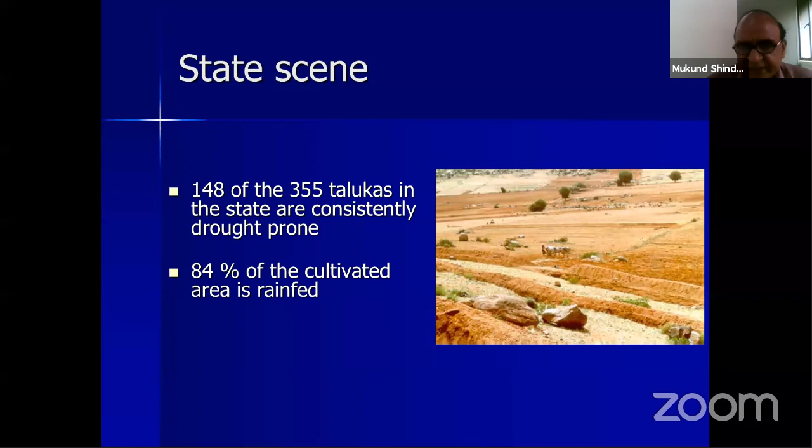Now, if again we take the context of the state of Maharashtra, this is the usual practice: 148 of the 355 talukas or tahsils in Maharashtra are consistently drought prone, and 84% of the cultivated area is dependent on rainfall for its agriculture.

So what is the solution actually? There are two solutions: one is construction of big reservoirs and the other is rainwater harvesting. Construction of big reservoirs has to take place at certain topographical locations. It is not necessary that we will find those locations or sites everywhere in the state.

In Maharashtra, most of these sites have already been exploited. Even the remaining sites, which may not be economically viable, even if dams are constructed there, the area under these big reservoirs will not go beyond 30%. So 60 to 70% of the area in the state of Maharashtra will depend on rainwater harvesting for making water available.

As far as India is concerned, this area will be around 50%. So 50% of the area in India will depend solely on rainwater harvesting for agriculture or domestic purposes. That signifies the importance of rainwater harvesting. It is the harvesting of the rain and resulting runoff where it occurs - that's what we call rainwater harvesting.

Now, looking at the potential of rainwater harvesting, this is a theoretical statement but still has its own importance. For example, if half of India's average annual rainfall of 1170 millimeters is captured over 1.12 hectares in each of the country's 5,87,226 villages, then the 6.57 million liters of rainwater collected will meet the annual cooking and drinking needs for an average village of 1,200 people. So that is the potential of rainwater harvesting.

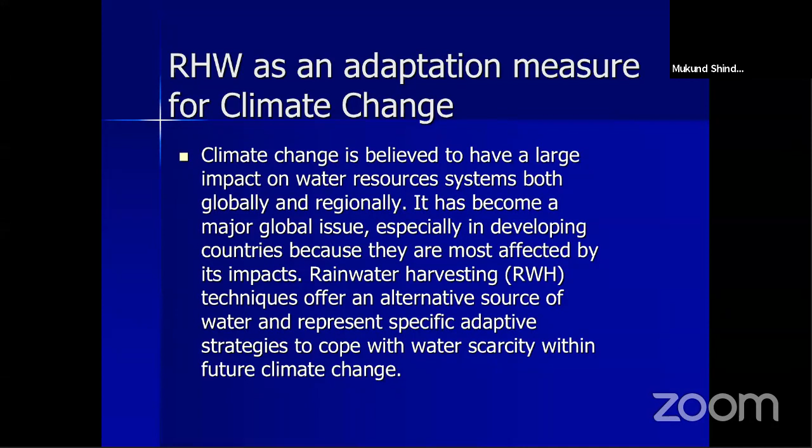So this rainwater harvesting - these are local measures or local interventions. Even if they fail, there is less risk of damage. They are decentralized and quite supportive to the local communities. Of course, they also come with some drawbacks, which I will discuss during the presentation.

Now, basically there are two major approaches of rainwater harvesting. One is in situ rainwater harvesting, which is capturing the rain where it falls, and another is ex situ rainwater harvesting. The in situ rainwater harvesting practices will be delivered by some other speaker - there is a separate lecture on this, so I will not discuss in situ rainwater harvesting here.

Ex situ rainwater harvesting involves moving water for some distance and storing it at a distance with big reservoirs. For example, these Nala bunds are very popular structures in watershed development programs. They are constructed on the main streams in the Nala, maybe of second or third order. They recharge the surrounding area and the aquifer below, hold the silt flowing through the streams, and have a good storage excavation ratio.

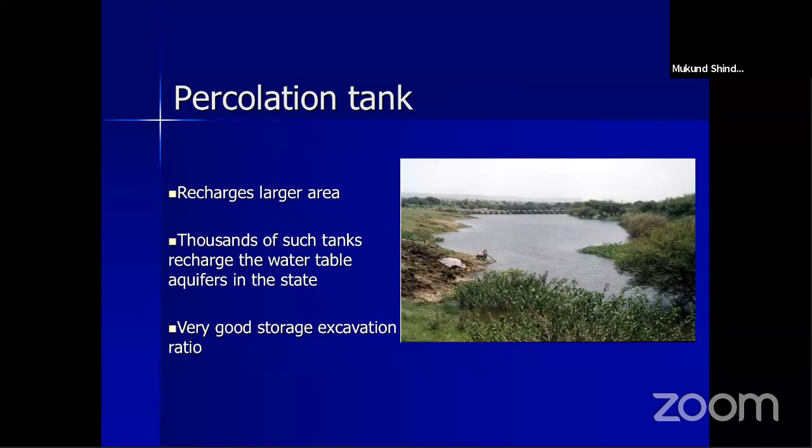Then the bigger structures in the watershed are percolation tanks. They recharge large areas - thousands of such tanks recharge the water table aquifer in Maharashtra. They have a very good storage excavation ratio.

Now, in Maharashtra and out of Maharashtra, in India, huge work on watershed development has been done since the past, and still it is progressing. There are many successful case studies. So I will briefly discuss a couple of case studies in Maharashtra.

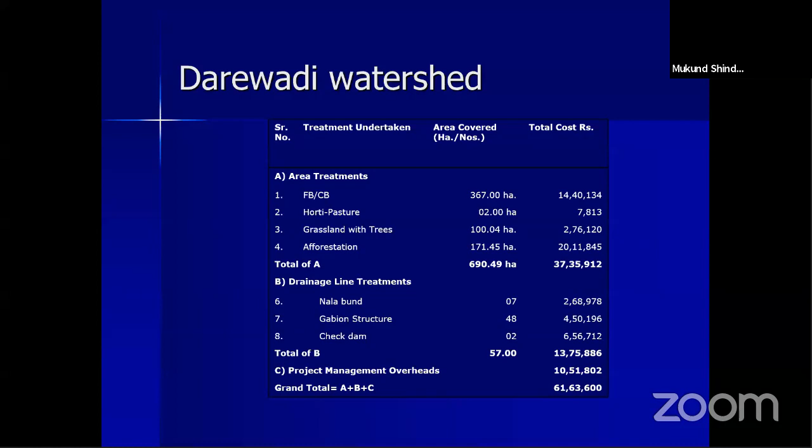You can see the statistics before watershed development, after watershed development, and the January 2005 situation. Before watershed development in 1996, tankers were needed every year. But after watershed development, during 2001, the village became completely tanker free, and it still is. The average depth of the water table below ground level was 6.5 meters before watershed development. After watershed development, since 2001, the groundwater level is 3.5 meters below the ground surface, and as of today it is around 3 to 3.5 meters below the ground surface.

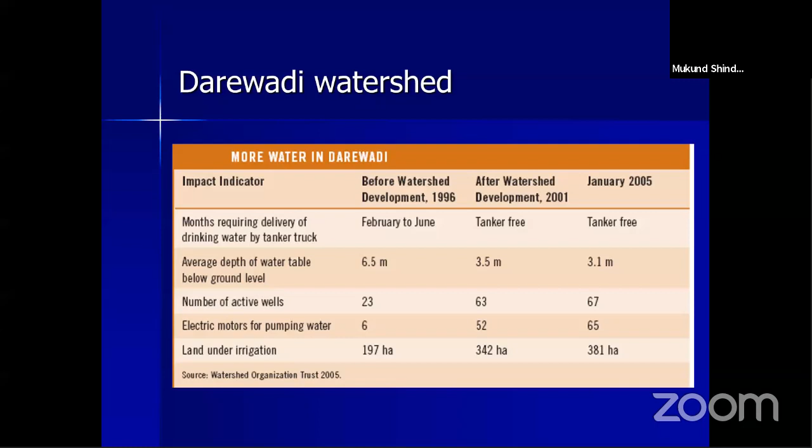There is another case study which is again quite popular, the Hivre Bazar watershed. This watershed development project is led by Popatrao Pawar, who received the Padma Shri award last year. This village is also very water scarce, with annual rainfall of 350 to 400 millimeter. The total cropping is rain-fed, there is heavy soil erosion, and problems of drinking water unavailability and unavailability of fuel wood.

Under the leadership of Popatrao Pawar, watershed development activities were carried out, resulting in a rise in the water table from 70-80 feet to 20-25 feet below the ground surface. There is a change in cropping pattern from traditional jawar and bajra to more cash crops like onion, potato, and horticulture, along with an increase in cropping intensity. There is an increase in fodder availability from 1,500 metric tons to 6,000 metric tons, and an increase in milk production from 300 liters to 3,000 liters per day.

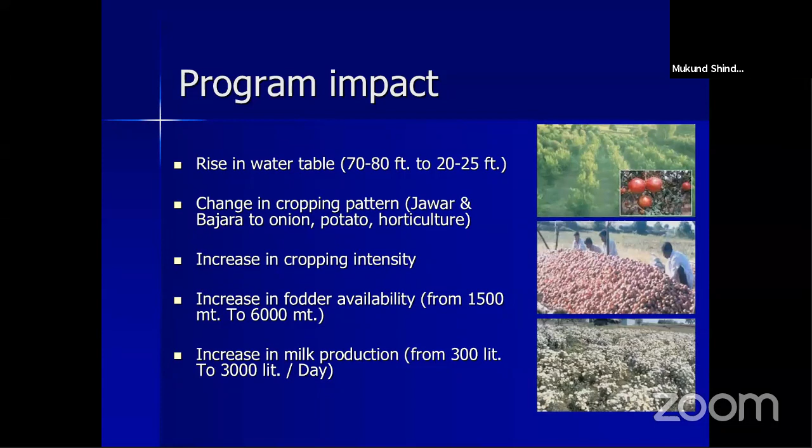Now, what are the benefits of these watershed development activities or projects? There is decrease in surface runoff, that is flash floods and soil erosion, increased surface water storage, increased groundwater storage, increased soil moisture storage, better crop yields, conservation of natural resources, better socio-economy of the village, and better sense of cooperation and community ownership among the villagers.

Now, we have one of the biggest programs of watershed development in the country, with an expenditure of around 2,000 crores per year, spreading from Rajasthan to Assam and Himachal Pradesh to Kerala.

The couple of case studies, success studies, which I just narrated, are actually very few as compared to the total watershed development projects in the state and the country. We don't find such success stories spread across different states of the country.

The results are not encouraging at many other watersheds. Many watershed projects have basic design flaws. During the early period of watershed development, there was a lack of community participation. Traditional structures were not accounted for in development. There is often failure in the primary objective of land degradation. Then there is a lack of consistent criteria for selecting villages, and lack of consistency in the norms and process of implementation of the watershed. These are some of the hurdles.

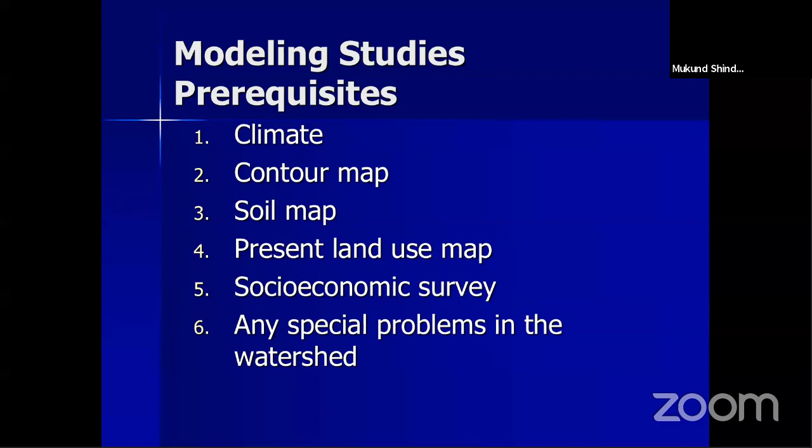And when you decide to go for modeling studies, there are some prerequisites in the form of data. For example, climate data, socioeconomic survey, and any special problems of the watershed. Then you have to go for peak rate of runoff, estimation of soil losses, upstream-downstream scenarios, designing different practices, estimation of crop water requirements, and any special problems.

So I will share with you one or two modeling studies which have been conducted as part of MTech and PhD research.

This is a decision support system for optimization of farm pond, based on the study of one MTech student guided by Dr. S.D. Gorantiwar, Head of Agriculture Engineering Department.

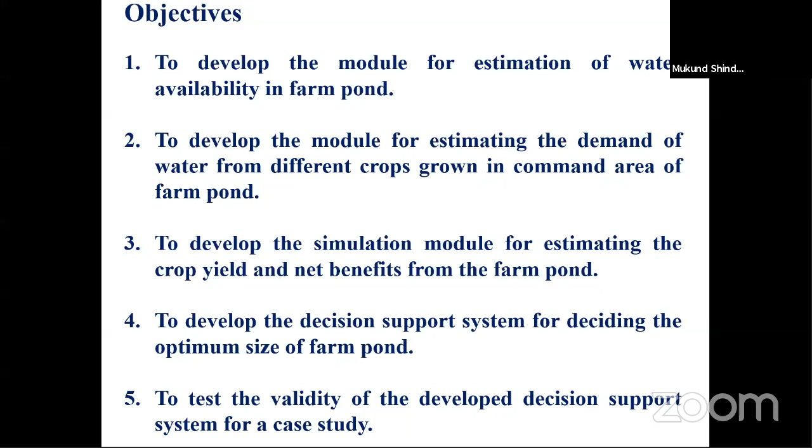The objective of this study was to develop a module for estimation of water availability in the farm pond, then to develop a module for estimating the demand of water from different crops grown in the command area of the farm pond, then to develop a simulation module for estimating crop yield and net benefits from the farm pond, to develop the decision support system for deciding the optimum size of the farm pond, and to test the validity of the developed decision support system for a case study.

So this is the equation of the pond water balance, a water balance equation which takes into account all the inflows and outflows. For example, VT is the volume of water stored in the farm pond on the Tth day, VT minus 1 is the volume of water stored on the T minus 1th day, and QT is the inflow to the farm pond through runoff on the Tth day.

QT1 is the inflow to the farm pond through other sources on the Tth day. RFIT is the inflow due to rainfall over the pond surface area on the Tth day. IT is the water released for irrigation on the Tth day. SLT is the seepage losses from the farm pond on the Tth day. SET is the water loss due to evaporation from the open surface on the Tth day. WDT is the withdrawal of water from the farm pond for other purposes on the Tth day. And V0 is the volume of water stored in the farm pond at the beginning, that is, when T is equal to 1. This equation gives the water balance of the farm pond.

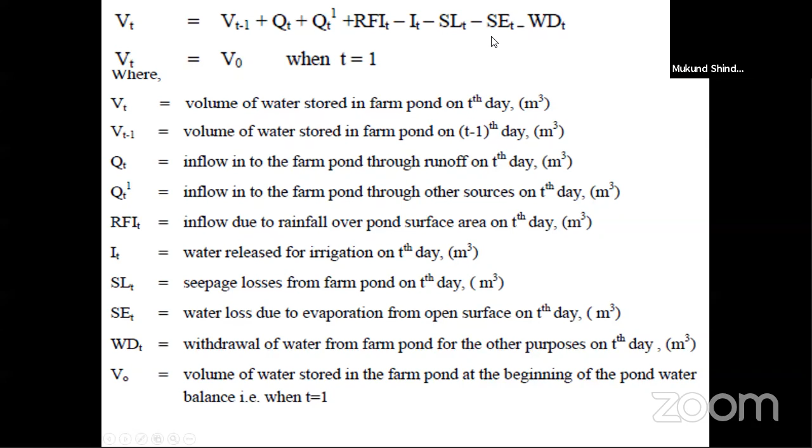Then the pond can be of different shapes. These are common shapes: rectangular, trapezoidal, and circular. These three shapes have been considered in this simulation model.

Then for the trapezoidal or truncated pyramid pond, we again have geometric equations for the surface area, wetted area, volume of water after change in depth, top surface area after change in depth, and surface wetted area.

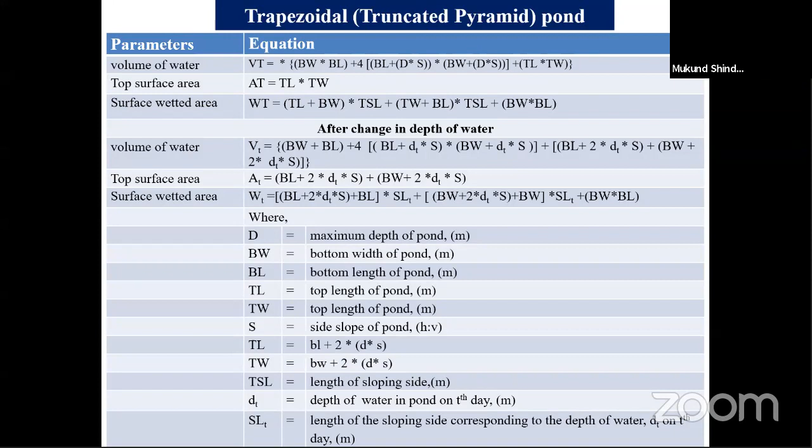Then the design of the pond, or deciding the size of the pond, depends on the following parameters: supply side and demand side. From the supply side, there is runoff as a result of rainfall over the catchment area, direct rainfall over the pond surface, and external inflow from other sources.

Normally, when we say pond, we assume it is a hydrological pond. In a hydrological pond, there is always inflow from runoff only, along with precipitation over the pond surface. So there are only these two inflows, and this water has to be used for domestic or agriculture purposes during the dry spells. There is an inlet and outlet to the pond for inflow water to come in and outflow to go out. But nowadays, many farm ponds we find are storage ponds.

Many times the ponds are fed with water from other sources like canals, rivers, or wells. So provision has been made in this model to have external inflow from other sources to the pond. Now, the water demand consists of seepage losses, evaporation losses, and crop water demand, that is, for irrigation.

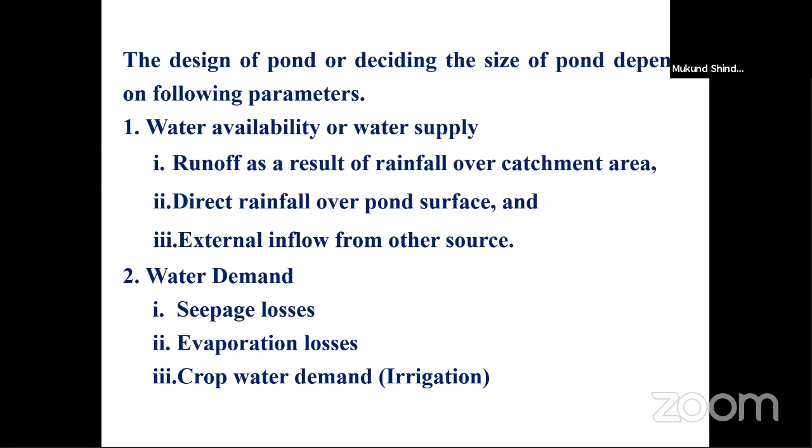Then water demand. Water demand consists of seepage, which is given by this equation. I will not go into the details of the equation.

Then evaporation is given by the equation SE T equals AT into ET divided by 1000. ET is the evaporation rate of water from open surface corresponding to the depth of water. Then same thing about the seepage.

Irrigation can be surface irrigation, drip irrigation, or sprinkler irrigation. These are the three irrigation methods considered in this model.

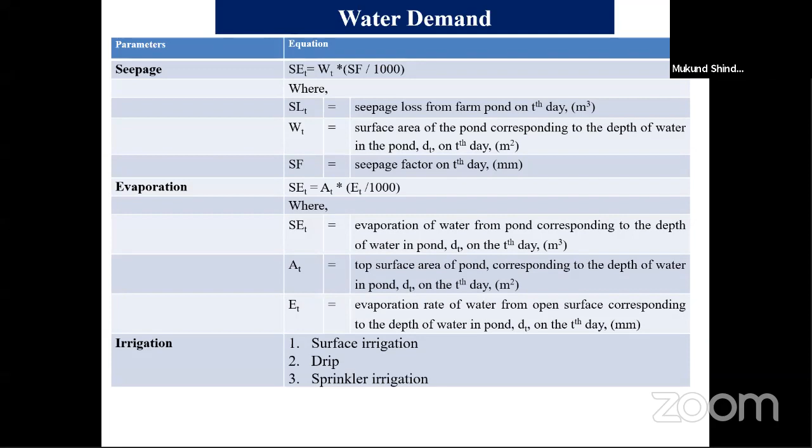There are some irrigation strategies. One strategy is pre-decided irrigation, that is fixed depth and fixed date, where we give irrigation on a fixed date and fixed depth. Then fixed date, variable depth is another strategy, based on the climatological approach. Then there is variable depth, variable date.

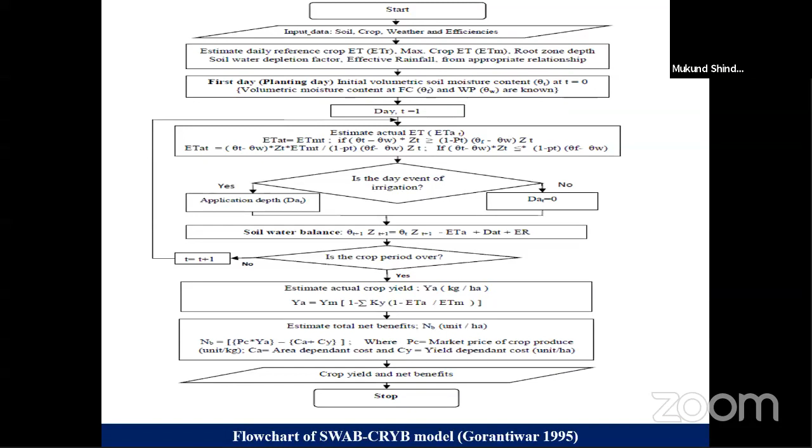So this is the flowchart of the SWAB-CRYB model. This farm water balance, or farm pond water balance module, is attached to the SWAB-CRYB model, which is again developed by Dr. Gorantiwar. This SWAB-CRYB model is a comprehensive model of soil water balance, which gives the continuous soil water balance along with the crop yields and the net benefits. This is the flowchart of this SWAB-CRYB model.

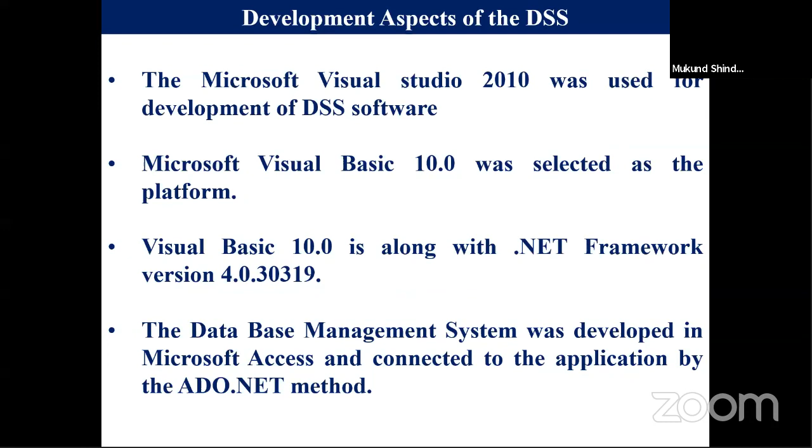So these are the results, and these are the screenshots of the model. This is the input screen of the model. There are icons like runoff, reference evapotranspiration, pond characteristics, pond water balance, simulation, and pond optimization.

These are the input details for runoff: total catchment area, runoff coefficient for the command area, input rainfall data file. Rainfall has to be given with the help of the file, for a number of years, and you have to select the years. Then this will calculate the runoff from the given data.

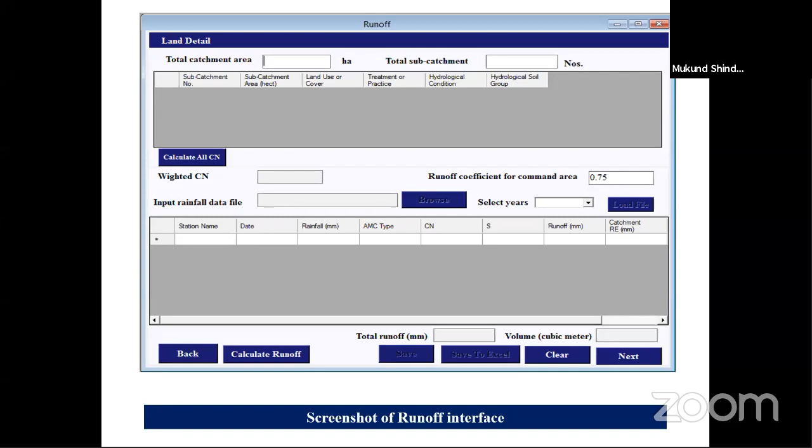So runoff will be daily runoff. Then for evapotranspiration, there are three methods supported by this model: Penman-Monteith, pan evaporation, and Hargreaves-Samani. We can select any of these three methods based on the availability of data with the user.

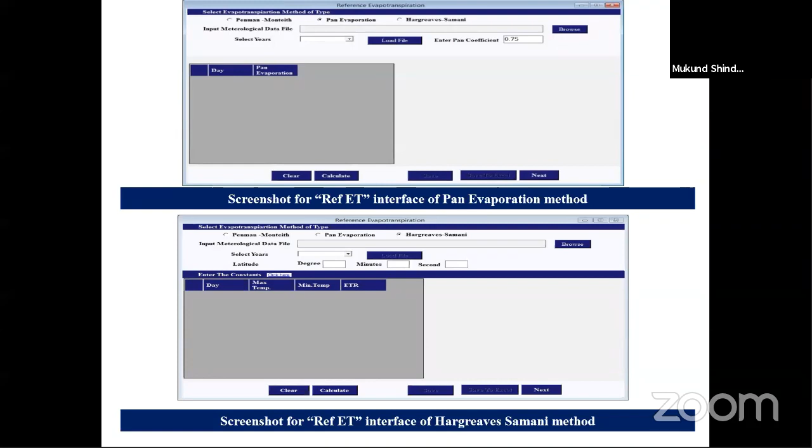So we have to select the data files. Normally these are all climate data files, and the model will give the output in the form of daily reference evapotranspiration.

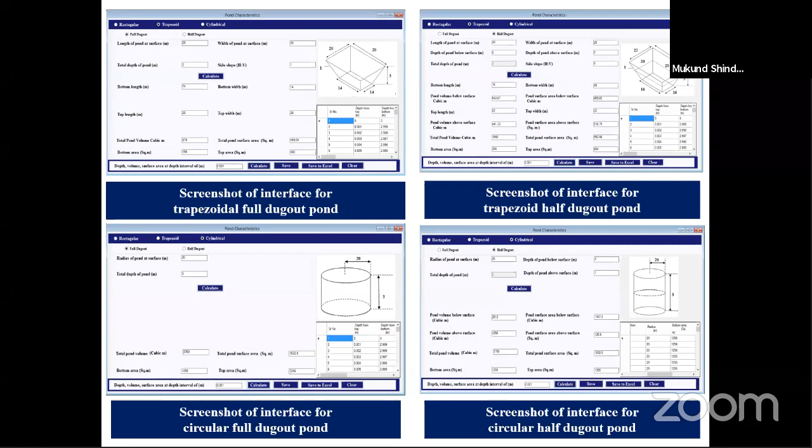Same thing about the screenshot of the interface for rectangular half dugout pond. Then these are the screenshots of the interface for trapezoidal full dugout, trapezoidal half dugout pond, circular full dugout, and circular half dugout pond. The geometrical length, width, depths, slopes we have to give as input, and the model will calculate the different areas and volumes, which will be required for calculating the water balance components of the farm pond.

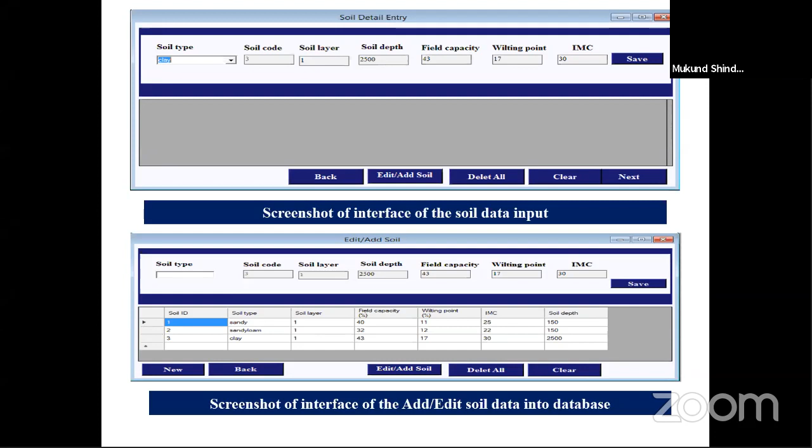At the bottom is the screenshot of the interface to edit and add soil data into the database, so you can add more soils to this database.

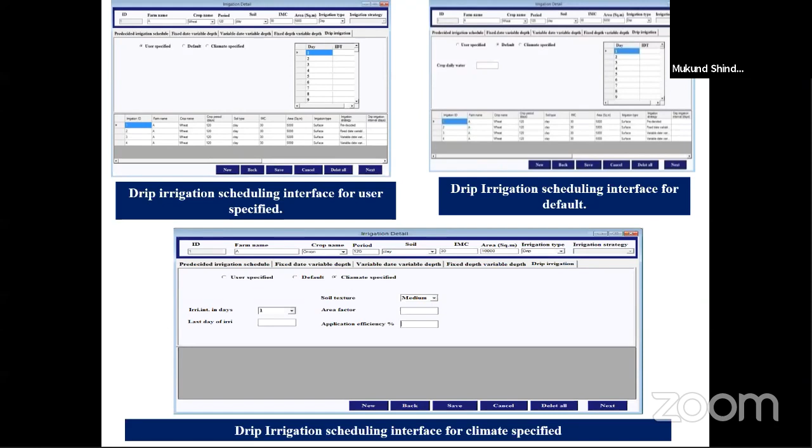At the bottom is the drip irrigation scheduling interface for climate specified, based on the climatological approach.

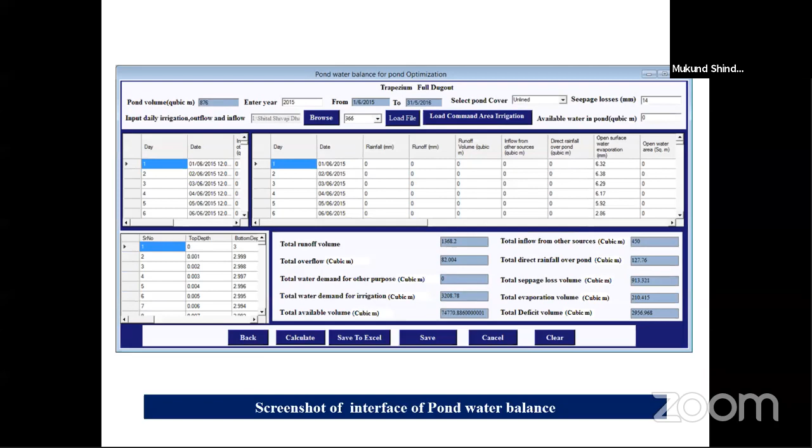This is the pond water balance optimization screenshot, where you get all the pond water balance parameters.

Now I will discuss this model with the help of a small case study. This is the case study of an area which is 2.33 hectares, with a total of two catchments of areas 0.85 hectare and 1.48 hectare.

Both the catchments are row crops. They are contoured, in very good hydrological condition, and the hydrological soil group is C and D.

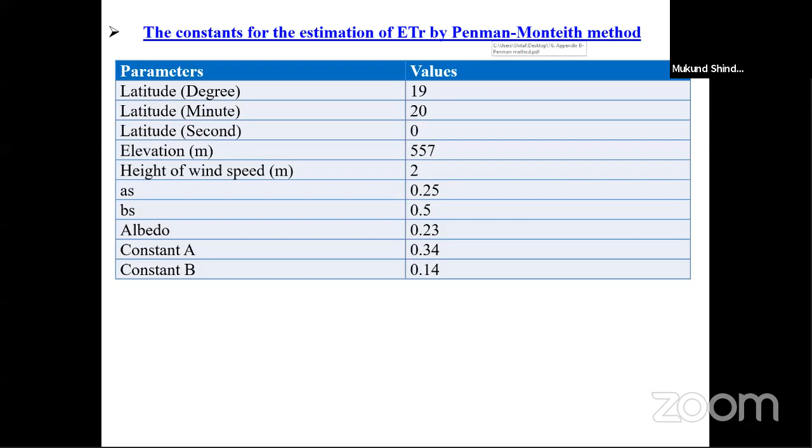These are the different parameters for estimation of ETr by the Penman-Monteith method: latitude, longitude, elevation, height of wind speed, AS, BS, albedo, constant A and constant B.

This is the interval which you can select for simulating the level of water in the pond, or the pond water volume.

These are the properties of the soil in the command area of the farm: it is clay type, moisture content at field capacity is 43, wilting point is 17, and available soil depth is 250 centimeters.

Details of irrigation strategies considered for onion and sorghum: for onion, it is climate specified; for sorghum, it is pre-decided.

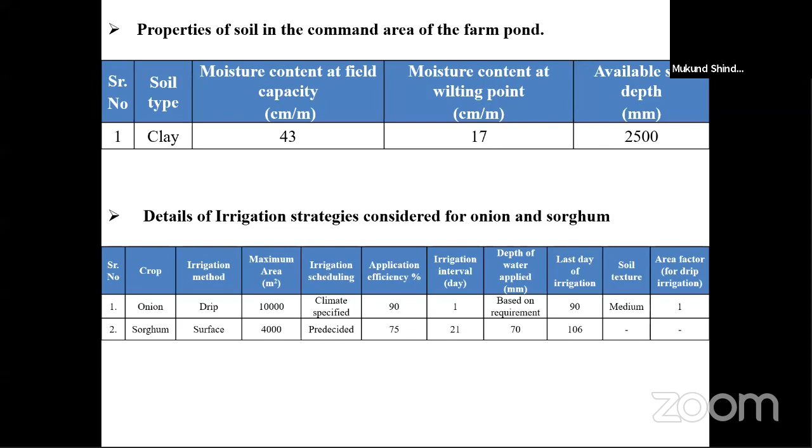The irrigation interval for onion is drip, with a 1 day interval. For sorghum, it is surface irrigation with a 21 day interval. For onion, as it is drip irrigation, application efficiency is considered as 90%, and for sorghum it is considered as 75%.

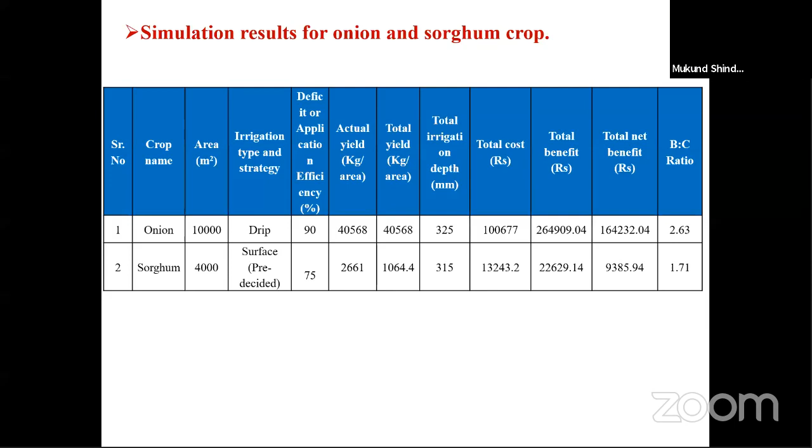So the conclusion is that a pond volume of 1,461 cubic meters is useful for onion over an area of 2,000 square meters, with rupees 32,846 net benefits for Rahuri region.

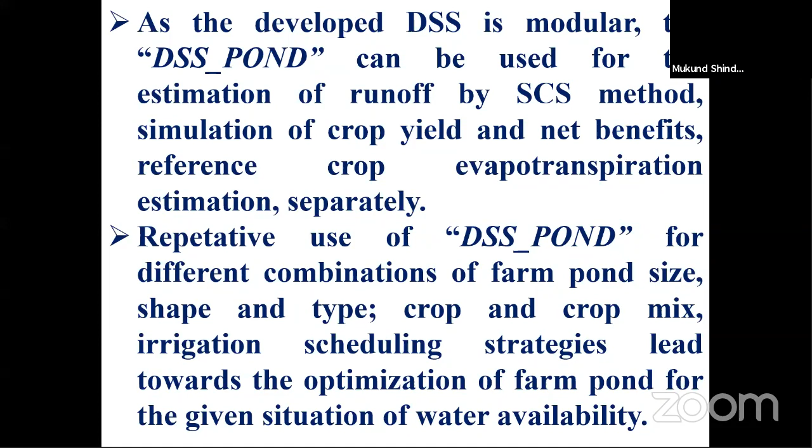So this was one model study. Another is based on my PhD research. I developed a model for designing the system of tanks in the watershed, and I named this model the Soft Tank Model. There are some research hypotheses.

For example, in situ rainwater harvesting systems influence the storages of downstream ex situ rainwater harvesting systems, that is, tanks. Hence both in situ and ex situ rainwater harvesting systems should be considered together in the methodology for optimum design of tank systems in the watershed. Rational design of the tank system for the watershed should be obtained by investigating different scenarios resulting from the combination of number of tanks, their locations, and types.

For example, there may be suitable tank locations, or suitable sites, in the watershed. There may be, say, 5 sites for constructing tanks. So we can have 5 tanks, or 3 tanks, or just 1 tank. Many times we find that the water in the tanks, apart from recharge, can be used for irrigation. This irrigation can be given upstream of the tank, or downstream of the tank. Based on all these factors, the hypothesis says these factors should be considered while designing the tanks in the watershed.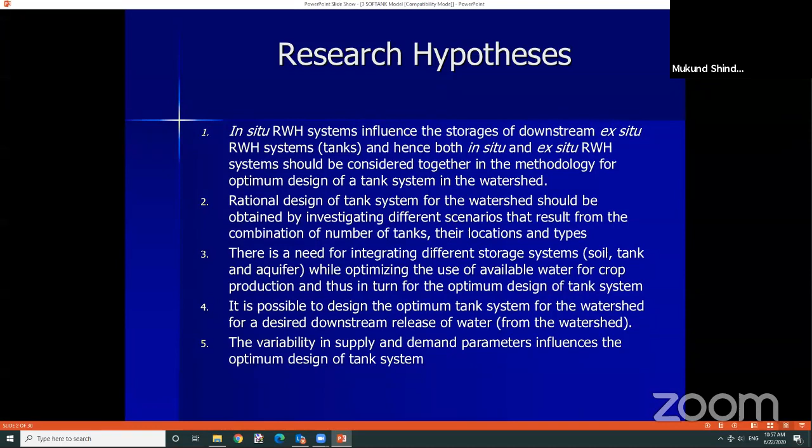The variability in supply and demand parameters influences the optimal design of the tank system. If there is a change in climate and resulting rainfall and runoff, it will affect the supply and the tank system design. Similarly, when there is a change in climate, there is a change in crop transpiration requirement, so there is change in demand. All these supply and demand parameters will affect the tank system design. Based on this hypothesis, this research was carried out, and it is conceived that in the watershed, all these in situ and ex situ rainwater harvesting practices are integrated.

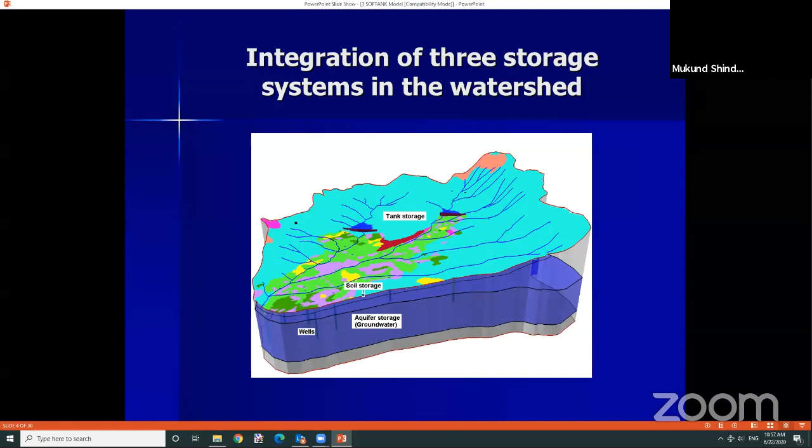This is the conceptual figure of integration of the 3 storage systems in the watershed - tank storage on the stream, or off the stream; soil storage, a thin layer of ground ranging from as less as 7.5 centimeters to as high as more than 90 centimeters; and aquifer storage in the form of groundwater. These storages store water from rainfall and runoff, which is used for domestic purposes and agriculture.

So I reviewed the literature of these modeling approaches and found that there are studies for single tank systems and multi-tank systems. The studies approaches were empirical, then simulation modeling, then simulation optimization modeling, and mathematical modeling. And then I found that there was some scope for simulation optimization modeling for multi-tank systems in the watershed.

So this is a flowchart of the SOFTANK model. Of course, this is a conceptual flowchart. The detailed flowcharts I have not given.

So first, the possible locations of the tanks are identified on the streams, that is the main stream. Then fields are allocated to these possible locations. Then the tank strategies are generated based on the tank location and the tank types. Then the catchment and command fields are allocated to these tanks.

Then different tank strategies are generated, and the simulation is started from tank strategy number 1. Then tank dimensions are calculated. Then daily simulation of field, tank, and groundwater balance is done.

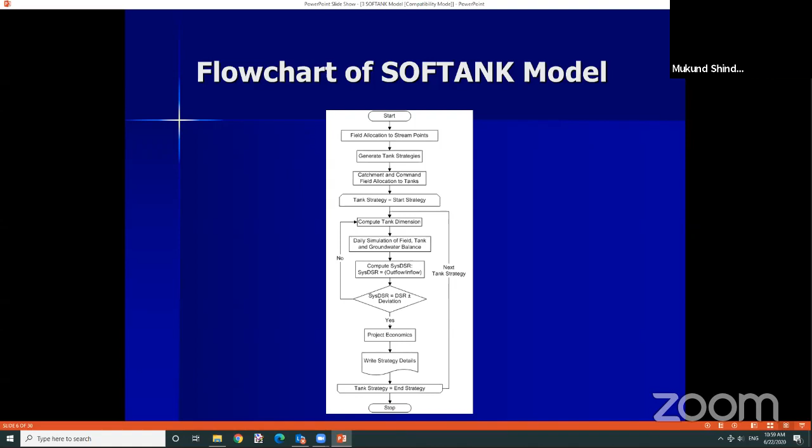Then the DSR, that is downstream release from the watershed, is computed. And if the downstream release is within the range of system downstream release, the simulation is stopped. If it is not, then it is repeated. And then project economics and strategy details are calculated. So this is a conceptual flowchart.

This model can be run in 4 modes, that is calibration mode, evaluation mode, simulation mode, and optimization mode. So in calibration mode, the model takes into account the groundwater levels for calibration.

So this is the example of the calibration of the model for Pimpalgaon Ujjaini watershed near Ahmednagar in Maharashtra.

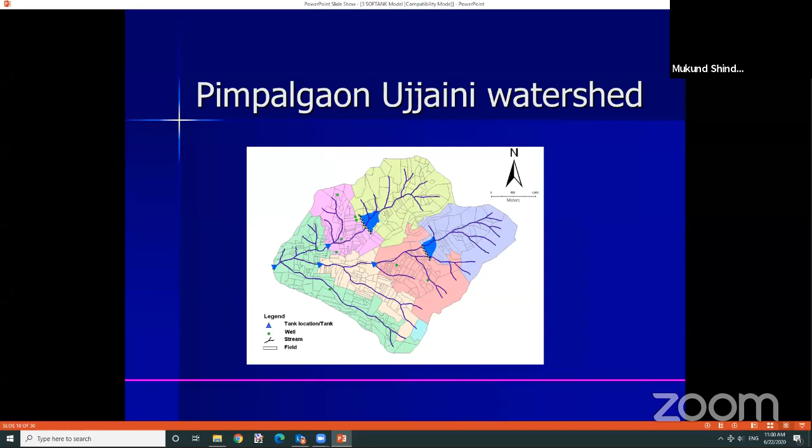Then again for evaluation mode, the example of the same watershed is given. So this is Pimpalgaon Ujjaini watershed. There are 2 big tanks on the streams, second order streams. There are of course wells, and agricultural fields below the tanks.

These are the land use of the watershed. So you can find that most of these agricultural crops are just in the command area of the tanks. In the catchment area of the tanks, there was no cropping practiced. So there are kharif crops, then rabi crops, double crops, fallow land, and shrubs. All these practices are marked in this land use map.

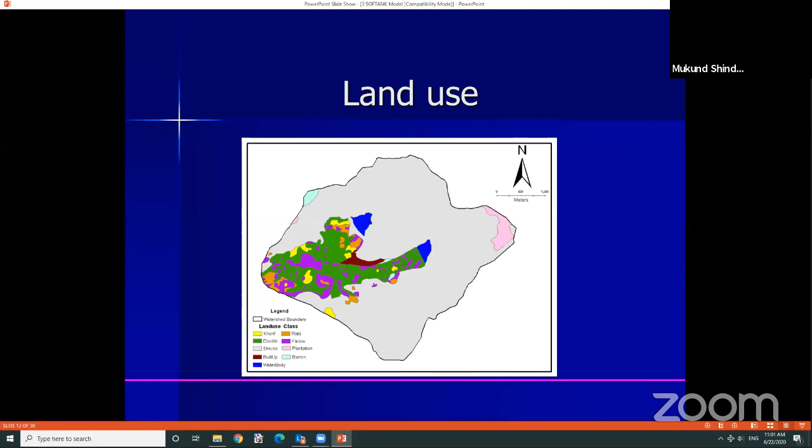So for the field water balance components, annual rainfall was 541 millimeter, then runoff was 21.5% of the rainfall. Then evapotranspiration was 67.5% of the total outflow. Deep percolation was 15.8% of the total outflow and 20.5% of the rainfall.

Now this is the individual tank water balance. So the tank capacities for tank number 1 and tank number 2 - tank number 1 was on the left hand side and tank number 2 was on the right hand side on the stream. Tank capacity of tank number 1 was 69.59 hectare meter, for tank number 2 was 21.69 hectare meter.

Inflow in tank number 1 was 42.42 hectare meter, for tank number 2 it was 32.69 hectare meter. Overflow for tank number 1 was 0, for tank number 2 was 3.38 hectare meter. Evaporation from tank number 1 was 6.03 hectare meter, from tank number 2 it was 4.20 hectare meter. Seepage was 36.23 hectare meter and 25 hectare meter from tank number 2.

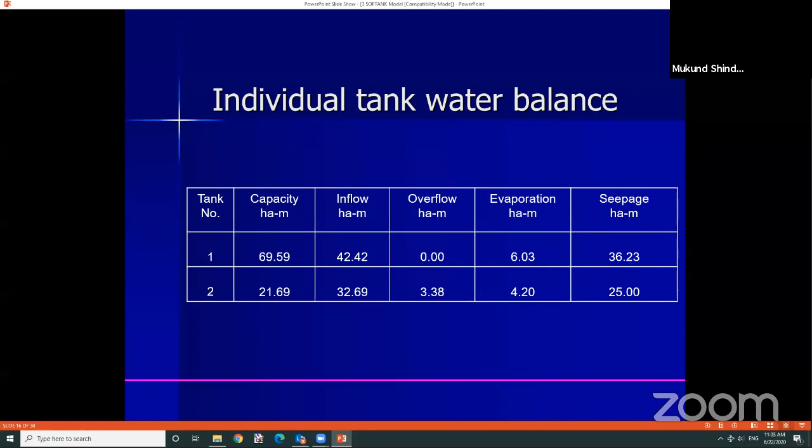So these are individual tank water balance components. Then groundwater recharge and withdrawal components - the model says that recharge from the tank was 29% in the watershed and recharge from the field was 71%. Whereas irrigation water use was 66% of the total use and base flow was 33% and other use was 1%.

So this is the summary of the evaluation study. Annual rainfall in the watershed is 541 millimeters. Total area is 1,326. Number of tanks in the watershed is 2.

Purpose of these tanks was groundwater recharge. Runoff in the watershed as a percentage of the rainfall was 21.5. Field recharge to groundwater as a percentage of rainfall was 20.5. Then inflow tank capacity ratio was 0.82.

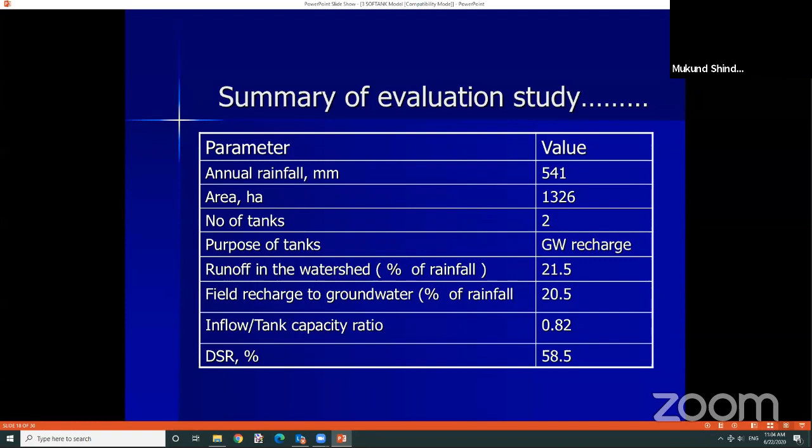Tank seepage as a percentage of the inflow was 83.6%. Evaporation from the tank was 13.6%. Tank irrigation was 0, because these were specifically percolation tanks for recharge purpose. Field recharge as a percentage of total recharge was 71%. Tank recharge as a percentage of total recharge was 29%.

Groundwater flow 33%. Groundwater irrigation 65%. Other use 1%. And the BC ratio of this system was 1.34.

So conclusions from the evaluation study: 42% of runoff is harvested by the tanks and 58% of the runoff goes as downstream release from the watershed.

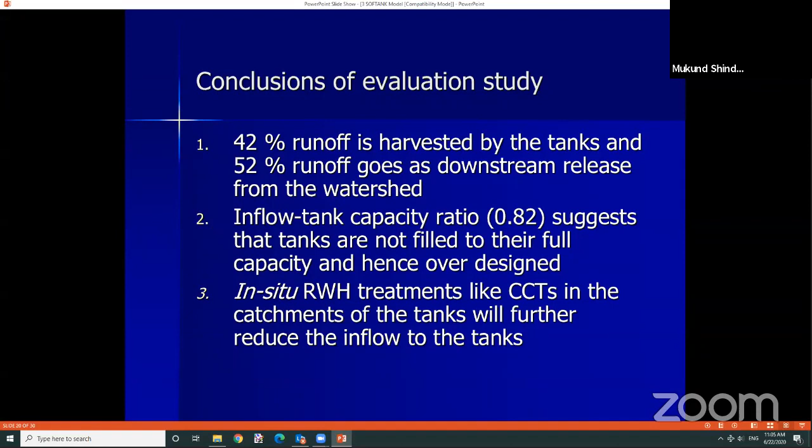The inflow tank capacity ratio, which is 0.82, suggests that tanks are not filled to their full capacity and hence they are over-designed. If any in-situ rainwater harvesting treatments like CCTs are taken in the catchment of the tanks, they will further reduce the inflow to the tanks, and hence it is not recommended to carry out any in-situ rainwater harvesting practices in this watershed.

Now the same model can be run in simulation mode. In simulation mode, say for example, there are three strategies we can test. Tank strategy number 49 gives two tanks at location number 2 and 4, shown in the figure on the left hand side.

Then tank strategy number 58, where tanks are at location 2 and 5, and tank strategy number 94, where the tanks are at location 3 and 6. So these different strategies we can test to see how they result in total benefits of the system, crop yields, and water balance components.

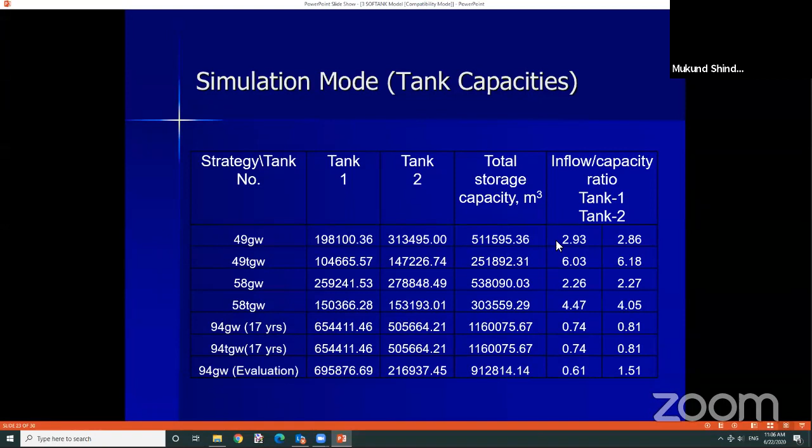So we can see that tank strategy number 49 is the strategy. What is the meaning of 49? That I will tell you. This tank is used for groundwater recharge and for irrigation, both. So strategy number 49, I will just show you.

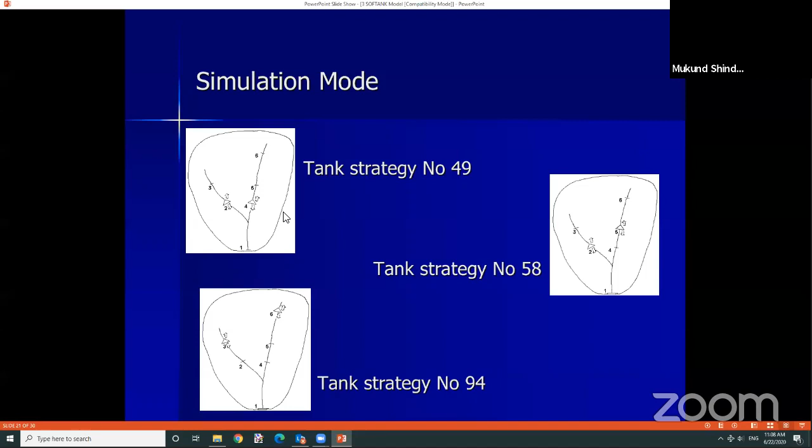So this is tank strategy number 49. We should locate the tank at location number 2 on the left hand side, and location number 4 on the right hand side, and the water can be used from the tank on the upstream and downstream side for irrigation and also for groundwater recharge.

This is how we can use this model in simulation mode for simulating different strategies. We can have different cropping patterns, and simulate the effect of different cropping patterns on the tank system design. We can simulate the effect of different climate scenarios on the tank system design, and different soil types.

And now the optimization mode. In optimization mode, the system is run for different years, for all the strategies, and for different downstream releases, say from 20 to 90 percent downstream release.

So 20% downstream release means we are harvesting 80% of the rainfall runoff in the watershed, and allowing 20% to go downstream. DSR 90% means we are just harvesting 10% of the runoff and rainfall, and 90% of the runoff is going downstream of the watershed.

So for different downstream releases and for different years, we get one optimum tank strategy by simulating all the tank strategies. Tank strategies may number in the few thousands based on the number of possible locations. As the possible locations go on increasing, the number of tank strategies increases exponentially.

So for example, during the year 75-76, for 20% downstream release, the model has given 1,804. This is the tank strategy ID, which represents a particular number of tanks and their locations in the watershed. For 30% downstream release, the tank strategy number is 49. For 40%, it is 85. For 50% DSR, it is 913. For 60%, it is 994. For 70%, it is 373. For 80%, it is 58. For 90%, it is 16.

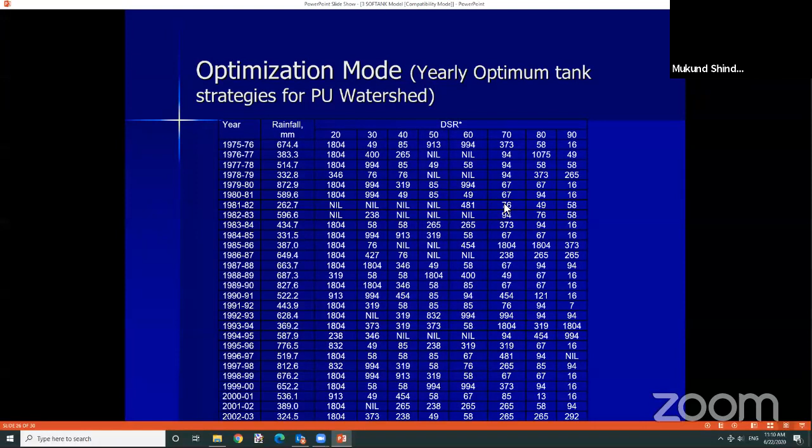Then we can plot this graph of downstream release versus net benefits. We see that as the downstream release goes on increasing, say up to 50%, the net benefits of the system go on increasing. Further increase in the downstream release does not increase the net benefits. So we say that the tank system which uses downstream release about 50% is the most beneficial, and then we recommend that particular tank strategy for that watershed.

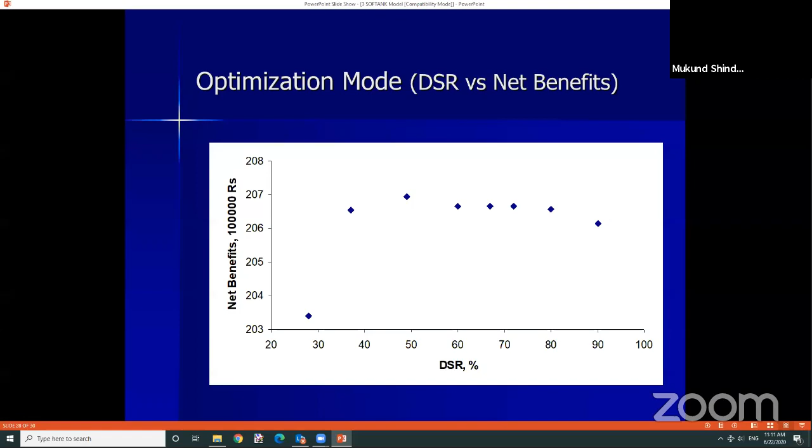So if we had used this model while developing the Pimpalgaon Ujni watershed, maybe this would have been our recommendation - that instead of constructing tanks at point number 3 and point number 6, we should construct the tanks at point number 3 and point number 5.

And these are the tank dimensions of the optimum tank strategy. For tank number 1, capacity is 36 hectare-meter. For tank number 2, capacity is 56 hectare-meter. These are the different dimensions, and these are the existing and simulated capacities of the tanks. For tank number 1, existing capacity is 36 hectare-meter, and simulated is 69 hectare-meter. For tank number 2, existing is 56 hectare-meter, and simulated is 21 hectare-meter. So there is quite a deviation in the tank capacities.

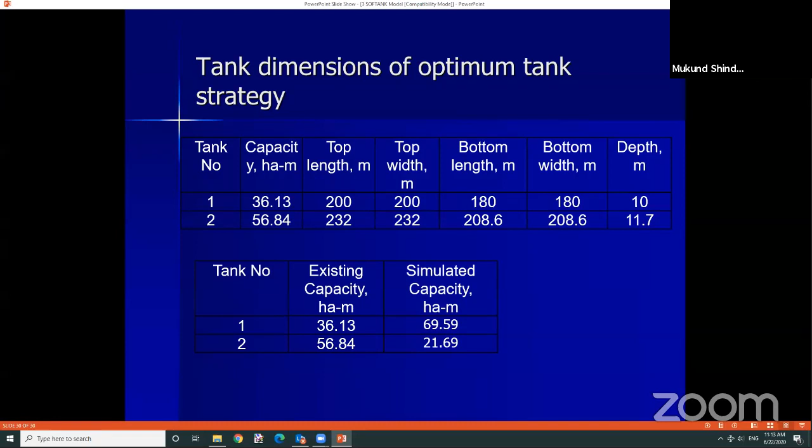Then we can have modeling studies for in situ rainwater harvesting. I will just discuss a couple of studies. This is again based on the PhD research of my student, where we have done the simulation modeling of ridges and furrows.

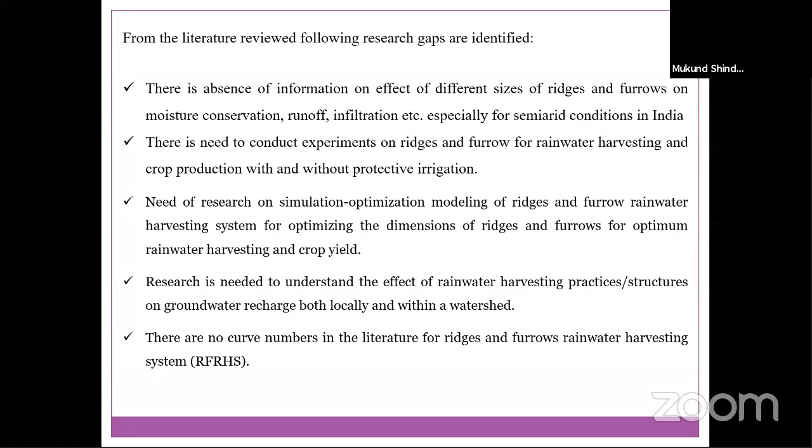The research was simulation modeling of ridges and furrow system for assessment of water harvesting potential in a semi-arid region. The objectives were: to develop the methodology for simulating different components of field water balance for in situ rainwater harvesting (ridges and furrows); to develop a simulation model; to measure different water balance components by conducting field experiments; to calibrate and validate the model. We studied the literature, found research gaps, and finalized the objectives based on this hypothesis.

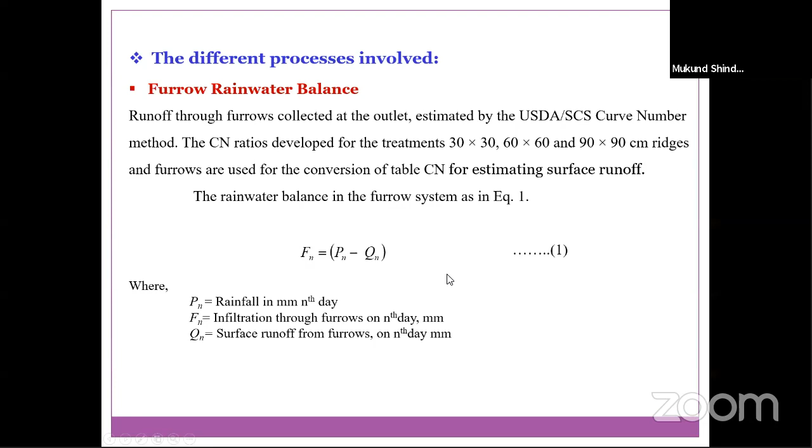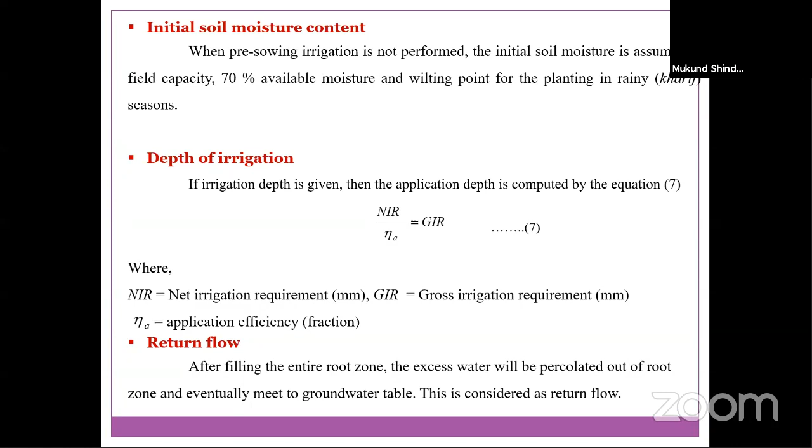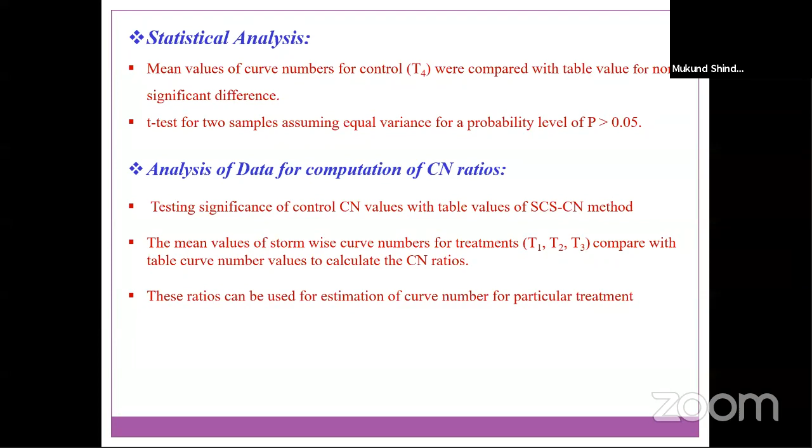Then estimation of net benefits. Then statistical analysis. Then analysis of data for computation of CN ratios. Then development of the actual simulation model for ridges and furrows.

These are the field experiments, conducted during the years 2015 and 16. Four treatments were taken: 30 centimeter ridges and furrow, 60 centimeter ridges and furrow, 90 centimeter ridges and furrow, and control, that is without ridges and furrow.

The individual treatment plot size is 12 meter by 28 meter, and the total plot was of the size of 48 meter by 28 meter.

Then physico-chemical properties of the experimental soil were determined. All cultural operations followed standard practices. Soybean crop was manually sown at a spacing of 30 by 10 centimeter. Daily weather data was collected.

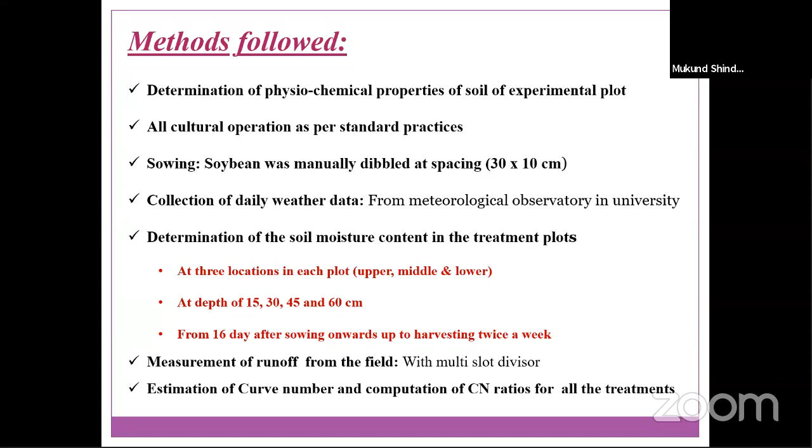Soil moisture content was taken at 15, 30, 45, and 60 centimeter depth at the upslope side, middle of the plot, and at the downslope side of the plot. Then runoff was measured, and curve number was estimated for different dimensions of ridges and furrows.

Physical properties of the soil: the textural class of the soil is clay loam, field capacity is 29%, permanent wilting point is 14%, bulk density 1.3, basic infiltration rate 19.3. These are the chemical properties.

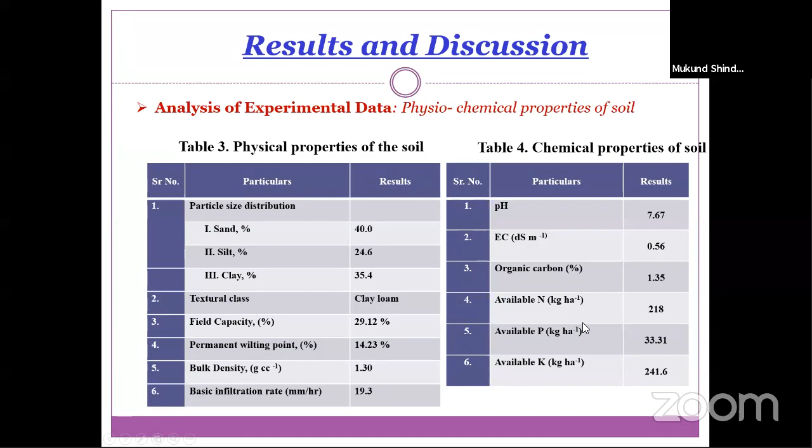Then cultivation details of the crop for the years 2015 and 2016. The crop was sown in the month of July in 2015 and in the month of June in 2016, and it was harvested in the month of October.

Total crop duration was 102 and 114 days in 2015 and 16 respectively. Total rainfall during the crop growth period in 2015 was 210 mm, whereas in 2016 it was 629 mm. So you can say both years were extreme - 2015 was a drought year, whereas 2016 was a wet year.

So ridges and furrow rainwater balance components were measured - that is rainfall, runoff, infiltration, soil moisture for both the years. These are the components. These are the runoff figures for 2015. These are the runoff figures for 2016.

Though we could not take many events of runoff because it was all flooded. There was no access to the field, and the multi-slot divisor was overflowed, and we had to skip some runoff events.

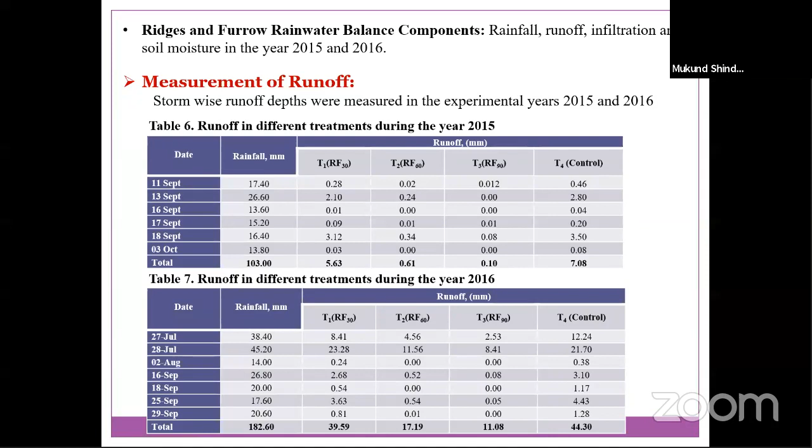So total rainfall during 2016 was 182 mm because we did not consider the extreme events. Actually, though the rainfall is 629 mm during 2016, we had to skip many observations because of the flood situation.

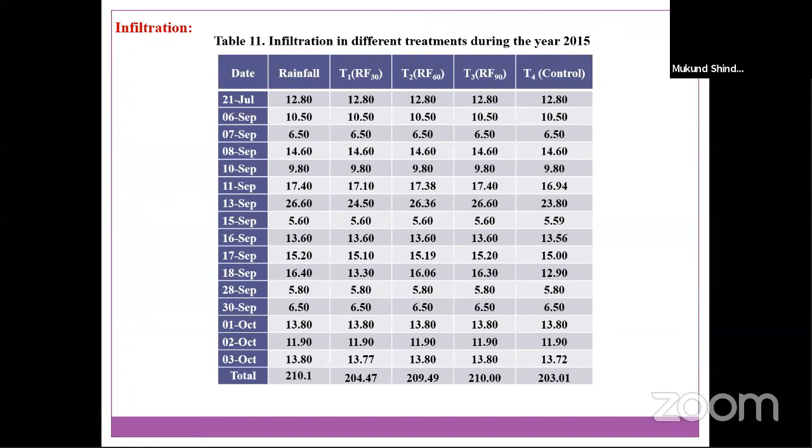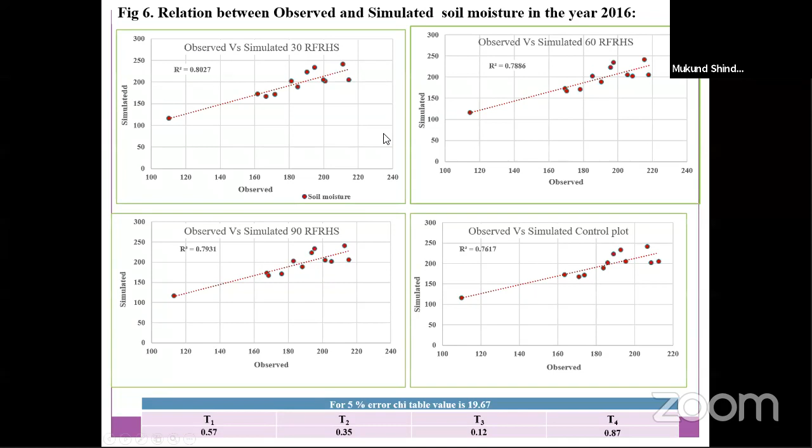60, 90, and control. We found that at lower depths, there are not much difference in the soil moisture among different dimensions of ridges and furrows. But for the top 15 centimeter, there was variation in the soil moisture. The 90 centimeter ridges and furrow had less soil moisture as compared to 60 centimeter and 30 centimeter ridges and furrows.

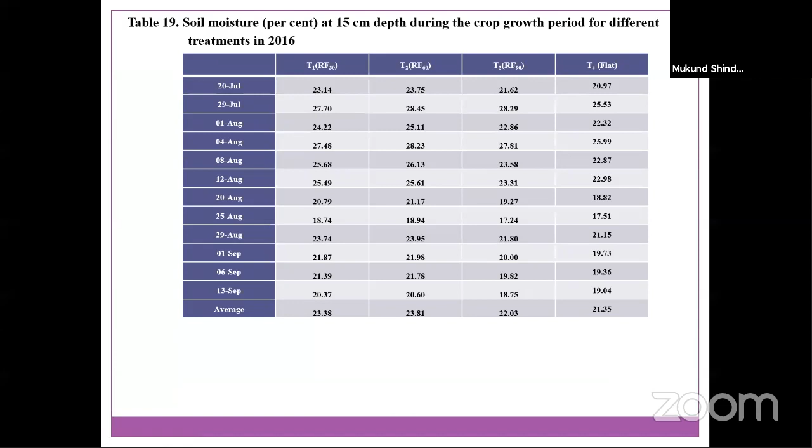Then variation in the soil moisture in the root zone in 2015 and 2016. This is for 30 centimeter, 60 centimeter, 90 centimeter ridges and furrows and control plot. This is for the year 2016.

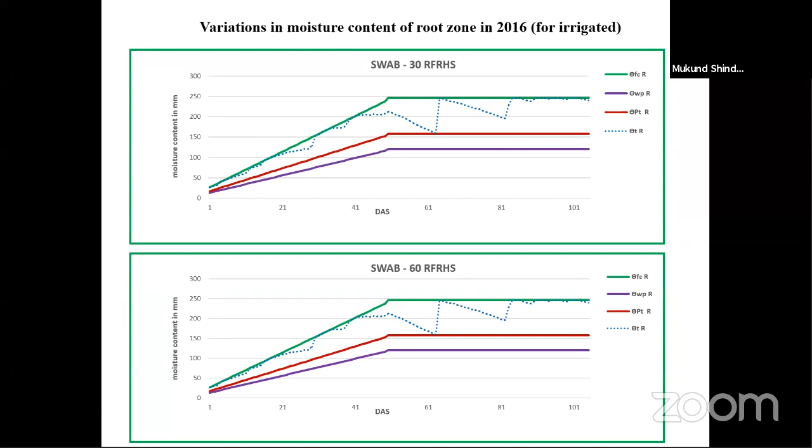The years were also classified into different types, like dry year, normal year, and wet years, for better analysis of the hydrology based on the nature of the rainfall.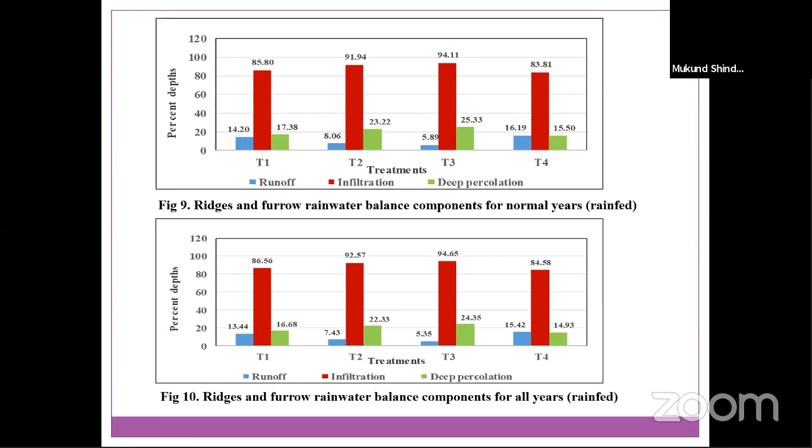The above graph is for normal years and the below graph is for all years, and the crops are rain-fed. Again, the ridge and furrow water balance components for normal years and for all years. Now the same is repeated for the irrigated scenario.

In the rain-fed scenario, we have not simulated the irrigation. It is totally rain-fed crop. Whereas in the irrigated scenario, we have simulated the protective irrigation.

Normally in our irrigation studies, we give irrigation at 50% soil moisture depletion. But in this case, we have increased that ratio up to 60%. So when 60% of the available soil moisture is depleted, then the protective irrigation should be given. The purpose is to have the crop rely solely on rainfall, and as far as possible postpone the irrigation. So irrigation is given just for survival.

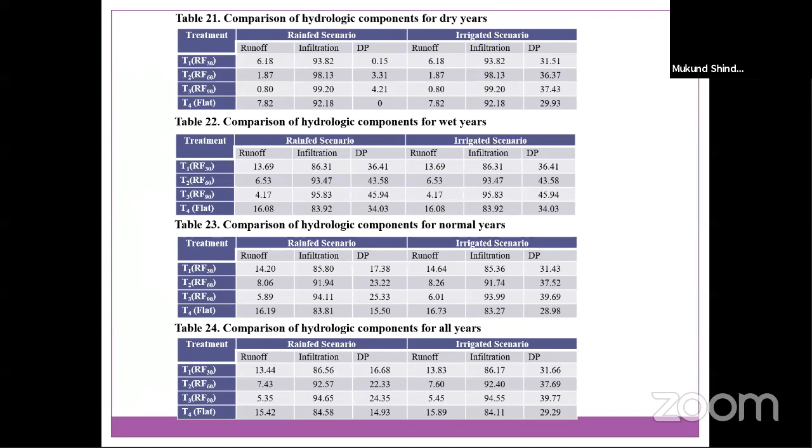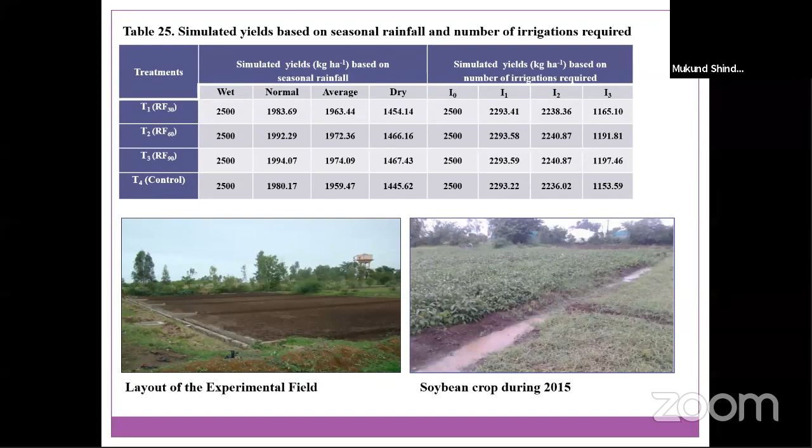These are the runoff plots in which the experiment was taken. This is the crop scene in 2015.

So this is the conclusion. The methodology has been developed for simulating ridge and furrow rainwater balance components. It has been converted into Excel programming by simulating water balance components.

Different water balance components of ridge and furrow systems were measured by conducting the field experiment. Then the model was calibrated and validated. In the field, CN values were developed for different ridge and furrow configurations, since earlier we didn't have CN ratios for different dimensions of the ridge and furrow. So in this experiment, we developed this CN ratio.

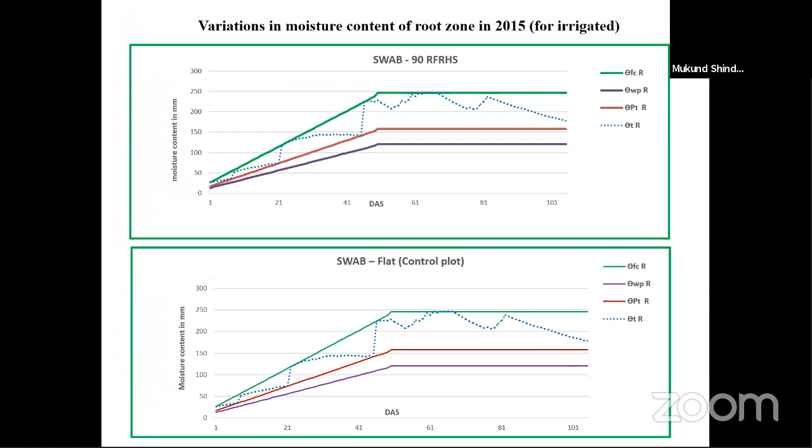Based on the simulation results of 22 years, we recommend that construction of 60 centimeter ridge and furrows is the best or optimum for better rainwater harvesting and better yield of soybean in the semi-arid region. Out of 30, 60, and 90 centimeter ridge and furrow, we found that 60 centimeter is the best size for such a climate, a semi-arid climate like Rahuri, taking the yield of soybean during the Kharif season as a rain-fed crop.

It is almost the end of the time. I will just take 5 minutes to illustrate the importance of the modeling study for another in situ rainwater harvesting practice. This was again part of my PhD, where we assessed the groundwater recharge through CCTs by simulating the CCTs in the model.

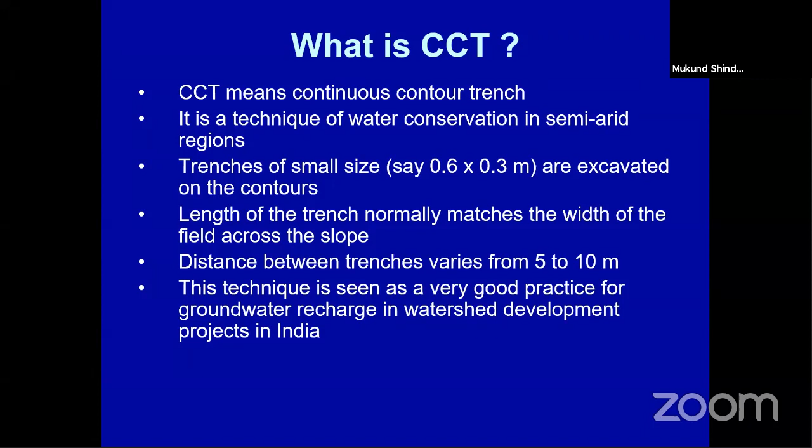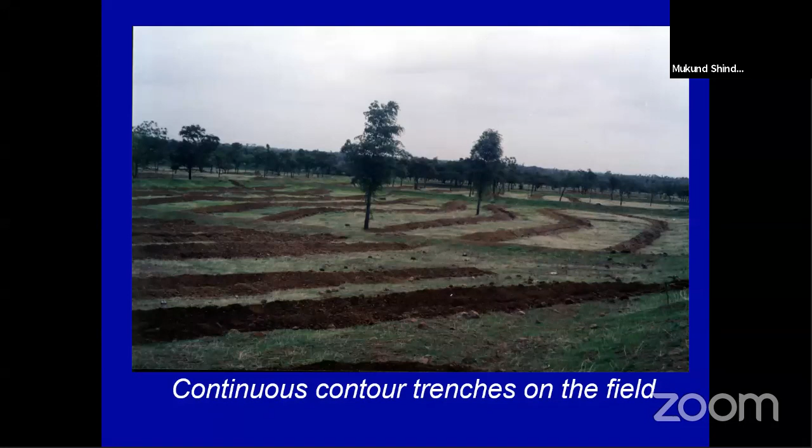This is the actual photo of the CCTs, continuous contour trenches, on the field. These are the objectives to derive the simulation model for assessment of groundwater recharge through CCTs: to estimate the water intercepted by the CCTs, and to estimate the groundwater recharge through CCTs.

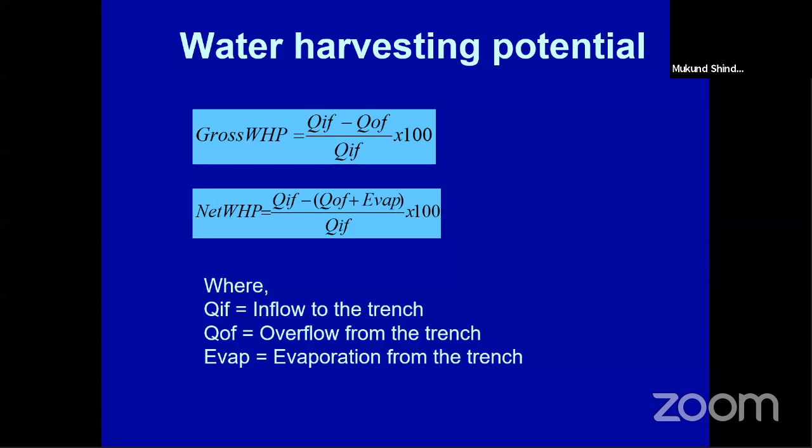The water harvesting potential of the trench system was defined as gross and net water harvesting potential. Inflow to the trench minus overflow from the trench, divided by inflow, was considered gross water harvesting potential, and inflow minus overflow plus evaporation from the trench, divided by inflow to the trench, was considered net water harvesting potential. Net water harvesting potential shows the groundwater recharge, which is the difference between the gross and net water harvesting potential.

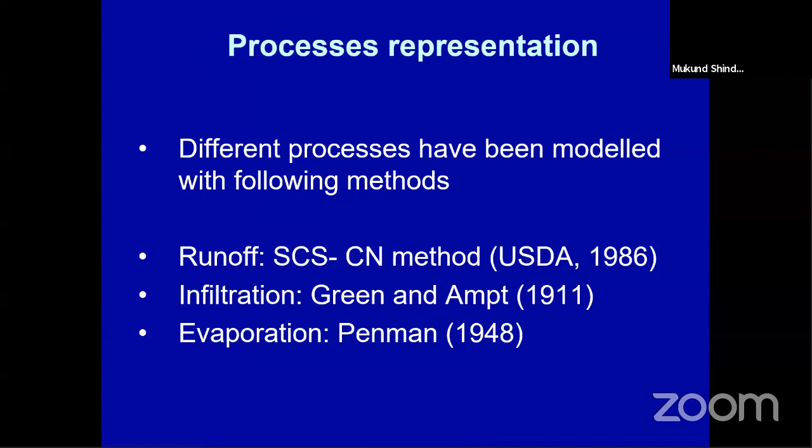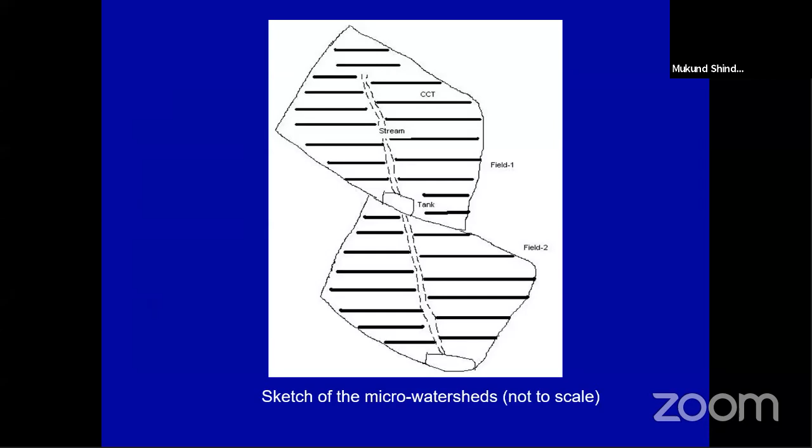Climatic data is from 1976 to 2003-4, 28 years. Different trench sizes were simulated: for example, 0.3 by 0.3 meter cross section, 0.6 by 0.3 meter cross section, then 0.6 by 0.6 meter cross section. The existing size is 0.6 by 0.3 meter, one was taken as half of the existing size, and one as twice the existing size. Then different spacings were simulated: 5 meter, the existing spacing, then 10 meter and 20 meter, 2 times and 4 times the existing spacing.

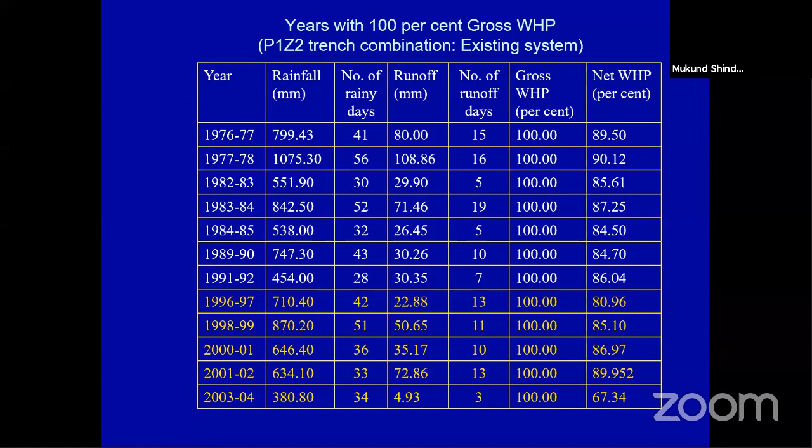Soil properties of the micro watershed were given, and this is the result of the simulation. Year-wise rainfall is given, number of rainy days, then runoff, number of runoff days, gross water harvesting potential which is 100%, and net water harvesting potential which is the groundwater recharge component. It varies from 89% to 67% during the different years, and the years with yellow figures had data taken for further study. These are the water balance components of the trench system.

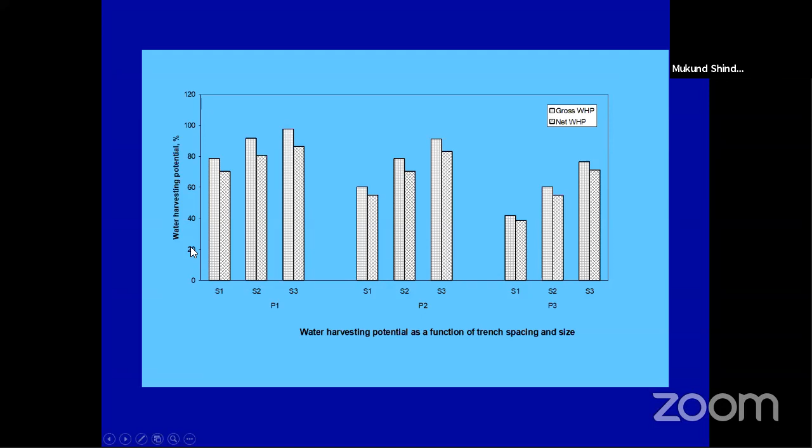This is the water harvesting potential as a function of trench spacing and size. For P1, P2, and P3, P1 is the closer trenches, P2 is further away, and P3 is further away still. So water harvesting potential decreases as trench spacing increases, and water harvesting potential increases for bigger size of the trenches.

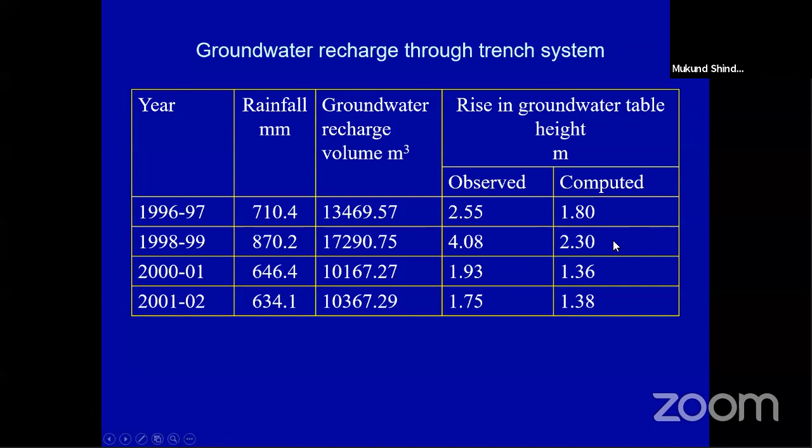This groundwater recharge through the trench system considered these 4 years. The observed and computed groundwater recharge are shown. The computed groundwater recharge is underestimated compared to the actual observed groundwater recharge, but still the trend is the same as the observed one. So the conclusion is...

This gives the simulation model for a water balance of the trench system. It is possible to understand the effect of the governing parameters like rainfall and trench geometry on performance of the CCTs with the help of the model. Though the model under-predicted groundwater levels, it does not deviate greatly, and the model can be used for assessing groundwater recharge through CCTs. Average contribution to groundwater recharge through the trench and the field are 53% and 47% respectively.

So this is all from my side. So the message is that...

For rainwater harvesting interventions for climate smart agriculture, we should have such modeling studies, and these modeling studies should be coupled with data which shows the change in climate, the GCM and RCM models, or it can be derived locally by trend analysis of historical data. If you take into account these data and input to such kind of models, you can have rainwater harvesting which we can consider as rainwater harvesting for a climate smart model. That is the message from this lecture.